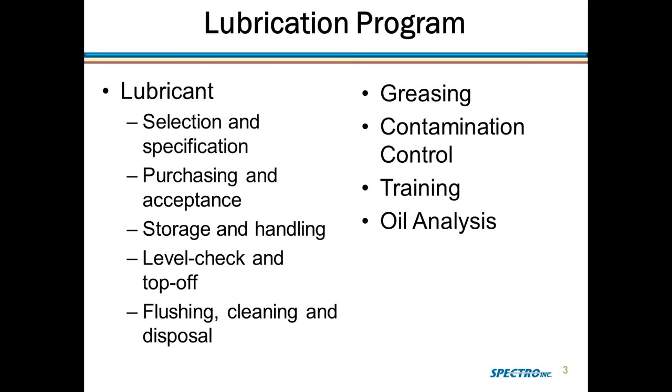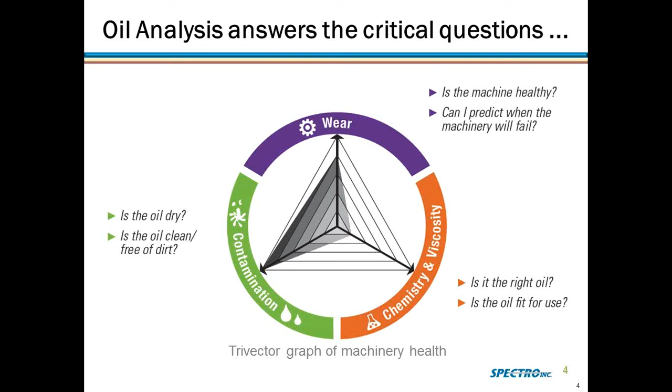From an oil analysis point of view, which is another condition monitoring technology besides just ultrasound, vibration, or motor analysis, oil analysis involves looking at three things: the wear condition of a machine, the contamination condition of the lubricant system, and the chemistry condition of the lubricant. Those three are pretty much independent, and we're going to take a look at those and explain how the reliability of the system is measured using oil analysis.

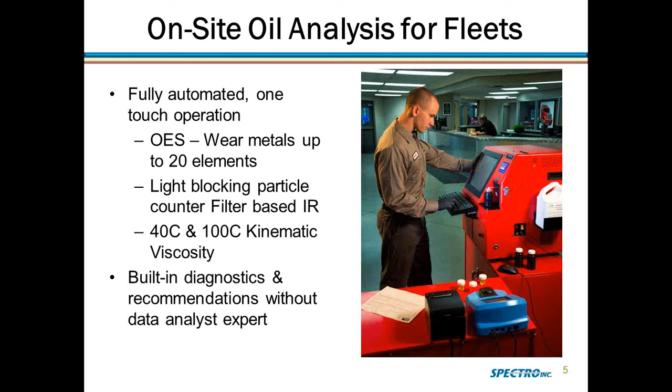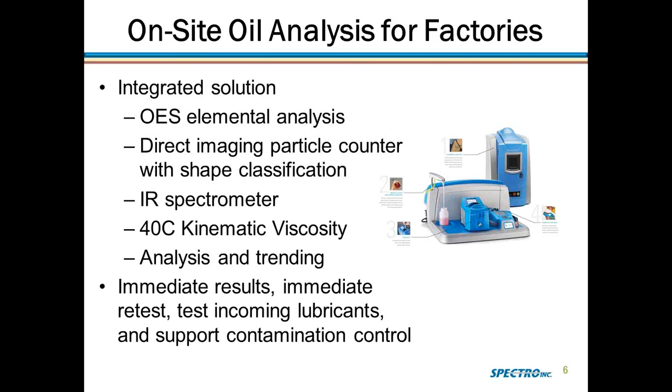A brief orientation to this presentation: we'll introduce Spectro to those who are listening, that's who's paying my bills. Then we'll talk about how to identify root causes, root problems and their causes for why machines fail. This is totally independent of which technology you use to look at the root problems, but it does give you an insight on how lubrication helps see those in addition to the other technologies people use.

Next is oil analysis results that guide maintenance practices. Then I'll give a case history and mention a few references if somebody would like to go back and check up on some of the things presented in this presentation. We'll naturally have questions after that.

Just to begin with, lubrication is typically a program within an industrial plant or in a fleet of vehicles or equipment. The machinery that's running is running on a lubricant film, and to keep that healthy and keep the machine running for a long time without a lot of noise and power consumption, there's normally a program that says we have the right lubricant, it's been specified, purchased, stored properly, we check the level, top off things, flush, clean, and dispose of the lubricants, do proper greasing and re-greasing. I know that's a big topic.

That's very much the life of a system, because abrasion we'll talk about here in a little while. Training is a key aspect of a lubrication program, and we're doing a little bit of that today. And then oil analysis is another aspect of a lubrication program.

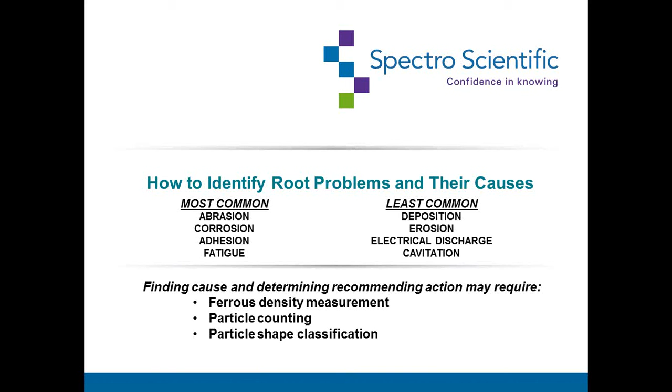Another 15% of the problems, which are less common, deal with deposition, erosion, electrical discharge, and cavitation. So on this slide, I'll just talk about those last four, and I won't bring them up again.

Deposition is what happens when you have varnishing, plating, or accumulation of material on a surface. A fan gets out of balance when it accumulates a bunch of debris on it. Valves and things start not functioning well when varnish accumulates on them. So that's a deposition problem.

All the rest of these, seven of eight here, are removal problems where they remove metal from surfaces. Erosion is what happens when you have blasting, like sandblasting, where particles impinge on a surface.

Electrical discharge is where you have electrical sparks that blast into a surface, typically where a bearing is carrying a current, and that's not supposed to happen. But when it does happen, because there's a gap there, the spark goes through the gap and blasts away a little bit of the material on the inner race or the outer race.

Cavitation is what happens when you have a pressure collapse, like on the backside of an impeller. So those are four that we won't talk about today, but the other four we will talk about.

Some of the key measurements people want to do—there are a lot of typical measurements, but the special ones we need to pay attention to have to do with looking for ferrous density measurement. That's a generic way to say I want to see particles that are iron and larger than 5 microns, because those are the real evidence of material damage from abrasion, corrosion, adhesion, or fatigue. They're going to typically show up big time in the ferrous density measurement.

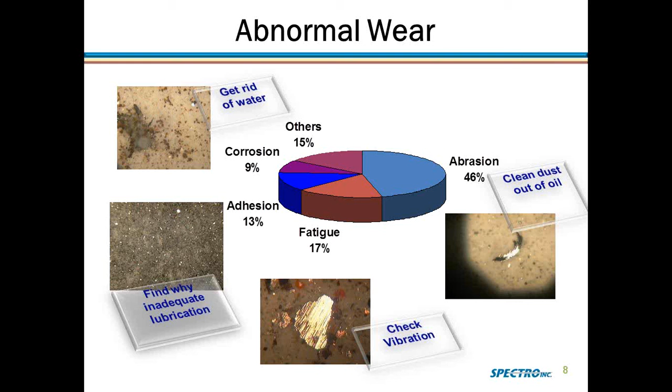Abrasion is caused when a piece of dirt or sand gets trapped in a nip, like between a roller and a race, a roller and an outer or inner race, or between gear teeth coming together. Just about any place a particle gets caught between two moving surfaces—if it's a hard particle, it will embed in the softer of the two surfaces and cut the harder one, producing a particle that looks like it came off a lathe. Like the picture on the lower right, it's pretty amazing. And abrasion is in many places public enemy number one.

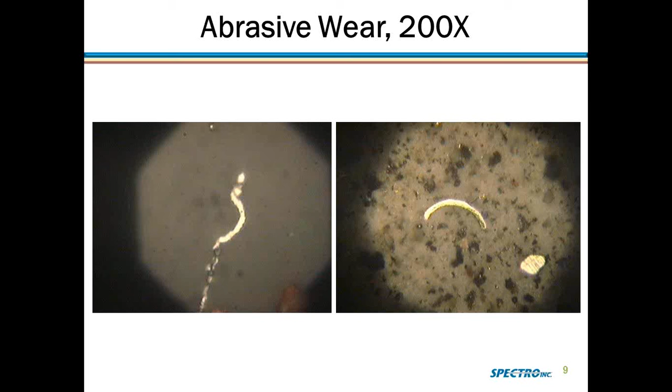If you can eliminate the dust contamination - because sand or silica cuts through steel like a knife cuts through butter - that helps a lot. That process of cutting or abrading the surface is very damaging and shortens the life of machinery a great deal. Fatigue is what happens when rollers... it's kind of like the rolling contact disease, and rolling takes place in two kinds of components.

One is obviously the rollers and races of roller bearings, but also at the pitch lines of gears, there's a rolling contact right at the pitch line where the heavy loads are transferred. That rolling contact produces a very intense Hertzian shear strain right beneath the contact line, and that tends to cause fatigue and spall, with particles coming out that look like chunks or platelets.

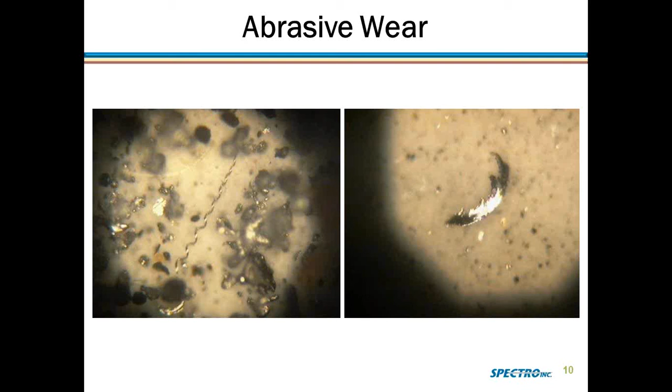Adhesion is what happens when we have inadequate lubrication - the sliding action. This is the sliding contact disease, whereas fatigue is the rolling contact disease. Adhesion is when the lubricant film is broken through, and that's going to cause a lot of heat, a lot of friction, and a lot of material removed, because the friction means you're doing a lot of work, and that work takes material off the surfaces.

So inadequate lubrication is definitely a problem because the lubricant film's been broken through. Normally a roller separates itself from a race by a micron, or a journal separates from a shaft by 75 or 100 microns or more. That spacing is critical to keep the life of the load-bearing surfaces long.

Corrosion is what happens when we have a corrosive media such as water or a process contaminant that attacks the metal surfaces chemically by oxidizing them, so that when a rubbing action takes place, it rubs off the soft oxide that formed. Okay, so let's take another look at these four things with a few examples.

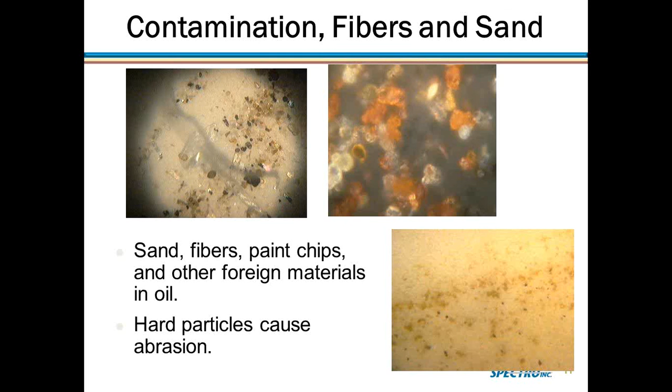This is clearly a picture of abrasion. It looks like something you picked up off a machine shop floor. This kind of particle is an indication that you have what's called three-body abrasion. A lathe would be two-body abrasion, where you put a cutting tool into a mandrel. In this case, a piece of sand introduces itself into a tight space and starts cutting a groove in the opposing surface it's contacting, and particles like this come off.

Some more examples of abrasion. You really don't need much explanation - anybody can understand this once you look at it.

So it's important to see what's inside of the lubricant. The lubricant does a nice job of carrying important evidence to you, the reliability team. I've heard it said that if we didn't have blood in us, a doctor would squirt some in us just so they could pull it back out, because it carries so much information the doctor wants to know. We don't do that for machines, but it's fortunate that machines have their own fluid, which can be pulled out and sampled to carry this kind of useful information to an interested observer.

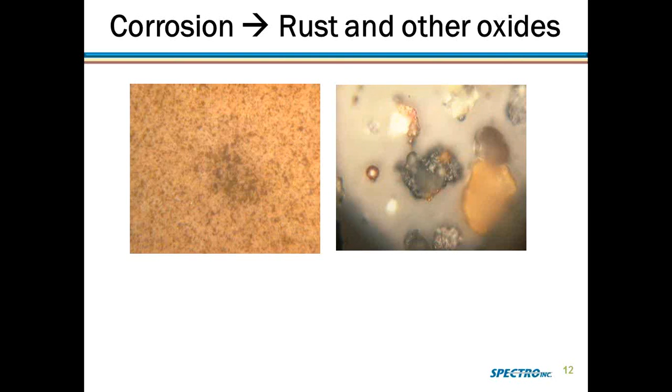If you really want to remove material fast, you use abrasion - like a grinding wheel or a cutting tool - and it removes metal fast. But if you want to remove it even faster, throw some lubricant down, cool things down, reduce the friction. You can cut twice as hard, or twice as fast, twice as deep with half as much load, just by lubricating the dirt or sand or the cutting tool, whatever it is you're using.

Unfortunately, the solution here is not to remove the lubricant, it's to remove the dirt. The dirt has to go, and we have what we call a contamination control program that sets target cleanliness levels for acceptable particle counts, assuming that a lot of that debris is actually hard particles like dirt.

Corrosion is basically, here's some red oxides. I only use this example not because it's the most important picture, but everybody recognizes rust as being red. At least certain types of corrosion on metal, on steel, are red.

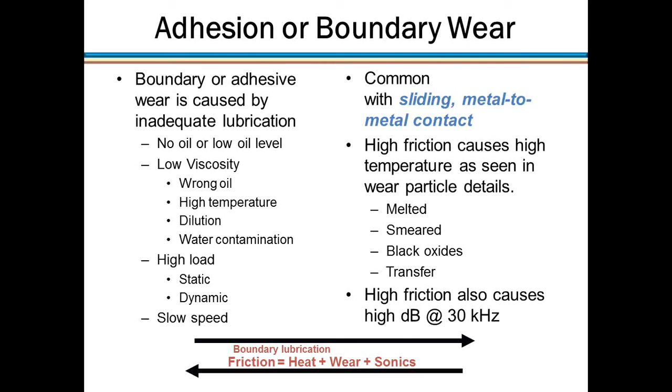The rollers are in rolling contact against the two races, but they're in sliding contact with the retainer. And you can picture that in your mind as the retainer or the cage is actually just kind of keeping the balls or the rollers, whether there's balls or cylinders or whatever they are, separated approximately an equal distance apart. The thing that keeps them in position relative to each other is a cage that slides against the rolling ball. It doesn't roll against them like the outer and inner races do.

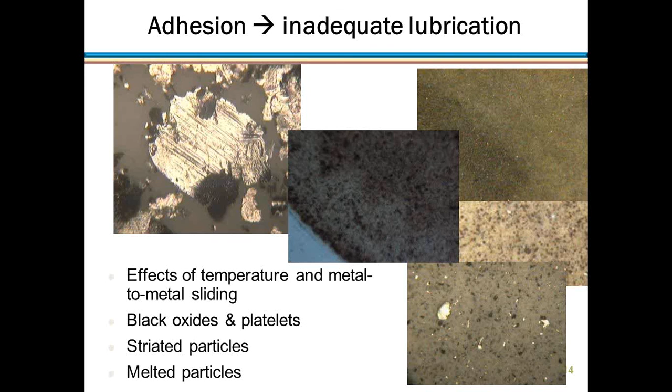And that sliding contact requires about 75 microns, or 3/1000 of an inch, of lubricant to keep it lubricated, as opposed to the roller to race, which only takes a micron, because of the very, very, very precise dimensions between the roller and the race. It tolerates incredible loads and very thin films to keep things apart.

I tell you that thickness difference in the two films, the film of oil between the roller and the race, and the much, much thicker film between the roller and the cage, because the first one to get starved is going to be your cage to roller contact. Now, there's not very much load in that interface, but there is a lot of friction, or at least a lot of friction noise, a lot of ultrasonic noise will be created when you have inadequate lubrication.

So I would just point out that that's a good topic for UE to pay attention to. In any case, the effects of this inadequate lubrication problem, which is so prevalent, is that you have heat, wear, and sonics, or ultrasonics, if you want to call it that. It'll have a very broad band of frequency outputs, from even a few kilohertz to hundreds of kilohertz of energy being emitted from that sliding contact.

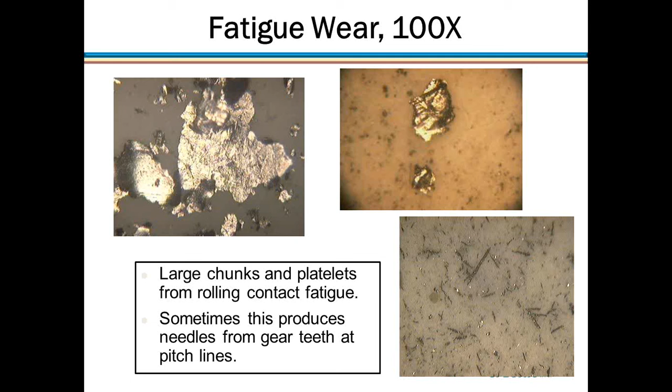Okay, back to more interesting things. We've got particles that come off of adhesion. There's going to be a lot of black oxides. There will be key ones that differentiate this from corrosion, which also produces black oxides in many metals: the appearance of platelets and striated particles that have scratch marks or rub marks on them.

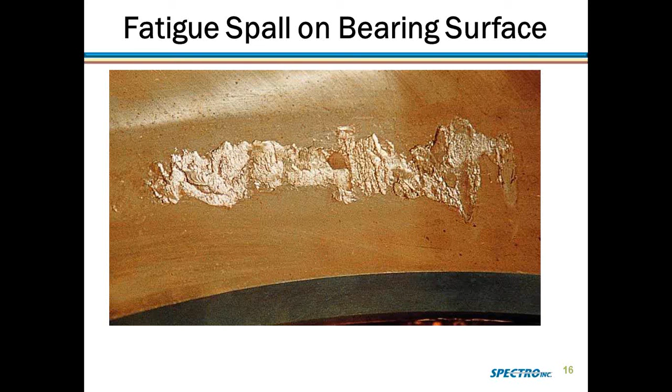Sometimes you'll see two different metals melted onto one another. Some dissimilar metals actually end up in the same particle because they've dragged across one another. So these show the evidence of extreme temperature, extreme pressure, and extreme force. And sometimes you'll even find sphericals, because something just totally melted and the liquid metal froze in the oil to form a little droplet, a sphere.

So it's pretty cool. Okay, fatigue wear is the next one we'll talk about here. Fatigue is what happens when you have rolling contact and millions of cycles. It's called high cycle fatigue. Low cycle fatigue is different, but this is high cycle fatigue, which means it goes through millions of cycles of the roller rolling over the race, or the gear at the pitch line transferring load to the next tooth at the pitch line of that next tooth. Those kinds of long-term loads cycling, they cycle over and over again.

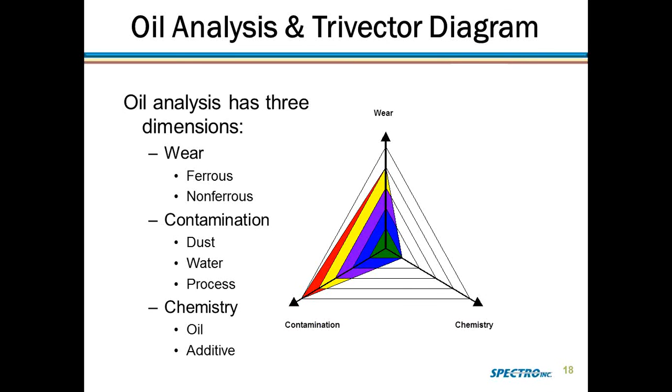That's a cumulative effect, and depending on how high the loads are, if you double the load, the fatigue life will be diminished by 90%. If you double it again, that 4 times increase in load will take it down 99%. So the fatigue life of a good bearing or gear or industrial component might be 40,000 hours of continuous service. If you double the G forces, and that's what we use to measure load in a vibration world, the dynamic loading is measured in G's or meters per second squared - take your choice. If you're running with 1 unit and you double that to 2, your fatigue life goes down by a factor of 90%. And if you double it again, it goes down by 99%.

And what you see happening is stress fractures happening underneath the rollers, underneath the surface - subsurface cracking due to Hertzian stress, which I won't try to explain in this presentation. But you'll end up with what looks like somebody has scooped out pieces of metal from the race or the roller or the gear tooth. And that's not anybody scooping anything out. All it is, is cracked subsurface that got interconnected until a piece of metal fell out into the oil.

Okay, that is over. Next section is all about oil analysis. So now that we understand why machines fail and how they tear each other up with the most common problems, we're going to use oil analysis to try and see those and their root causes. And by the way, if you do an oil analysis program and you don't use it to impact the maintenance practices, then you better just stop, because somebody thinks you're doing a good job. Oil analysis really has to change maintenance practices or you're just spending money - you have to use the information. I can't tell you how many people do oil analysis like they're taking vitamin pills, and they don't really have any benefit from it. So don't do that. It's good information. Use it and change your maintenance practices based on what you hear. You get excellent return on investment, and I'll talk about that at the end of this presentation.

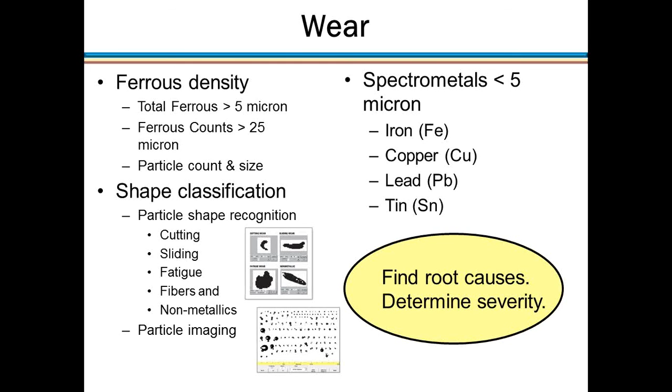Okay, repeating, oil analysis has 3 dimensions. Normally, the wear component looks for both metals that are ferrous and metals that are non-ferrous, like copper or antimony, lead, tin. Contaminants are dust and water. Now, water covers 3/5 of the surface, dirt covers 2/5, and those are our 2 main enemies. Those are actually the biggest things going on here - dust and water. And then there's process contamination too, like a lot of acids that can come from some processes. And the chemistry of the oil has got to be healthy. If you put a good lubricant in there and have the right lubricant at the right level and it maintains its healthy condition, that's a nice thing to do, and there's really no excuse for not keeping the lubricant in good healthy condition.

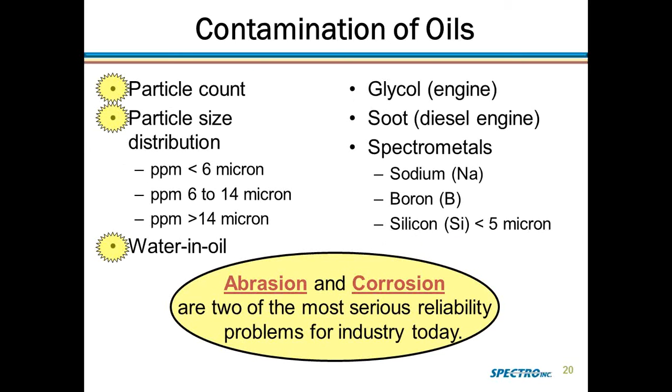Okay, looking at the wear thing again, how do we do this with oil analysis? Well, first of all, we need a ferrous density measurement, which means we're looking for total ferrous particles larger than 5 microns. That's really important because I don't really want to know about the oxide metal, and that's going to be submicron size. What I care about is the real metal. The oxides are not metal, by the way. The truly metal - iron or copper, whatever particles you see in there - when they're metal, that means you tore them out of the surface and there's something abnormal happening. The oxides, 98% of them are perfectly normal, so you don't want to get lost trying to chase normal.

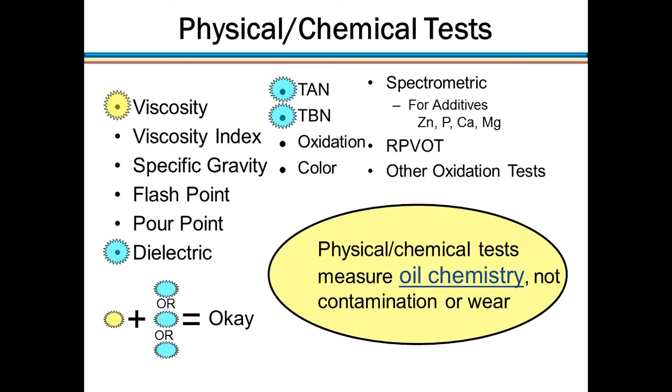Ferrous counts - a new instrument that we'll talk about here is actually doing a total ferrous count, counting all the ferrous particles larger than 25 microns, as well as counting and sizing all of the particles, ferrous or not. So that's a pretty important thing to help look at wear.

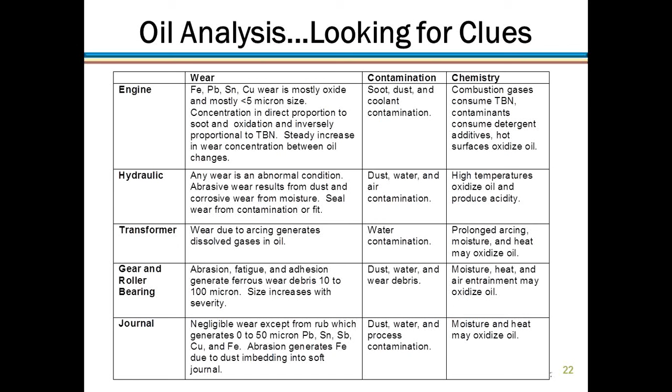The next thing is a subject called shape classification. Until this year, I've always preached the idea of wear debris analysis, because you really want to know what these shapes are, and until recently, you just had to use a human being and a microscope to see them. Now, the 2-dimensional imaging camera in a particle counter can see not only the size and count of particles, but it can actually shape classify the particles and give you a complete report and analyze those shapes - tell you how much is cutting, sliding, fatigue, and non-metallic or fibers. Okay, particle imaging is really important to finding out the root cause so you can do the right corrective actions.

In addition, it's very important to use, particularly for engines but also for other machines, an elemental analysis technique looking at the very small particles in addition to the very large ones. The small ones are best seen with a spectrometer, and you can see all the elements—20 or 25 elements even—iron, copper, lead, tin, and we'll talk more about that.

Contamination of oils—in order to see those contaminants, you care about water and you care about solid particles. So we want to count the particles, size the particles, and measure the water in the oil.

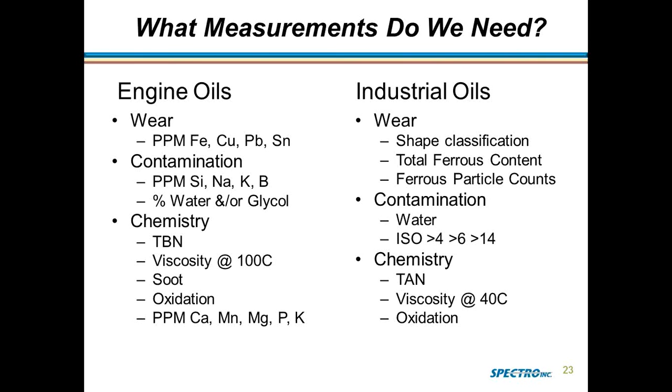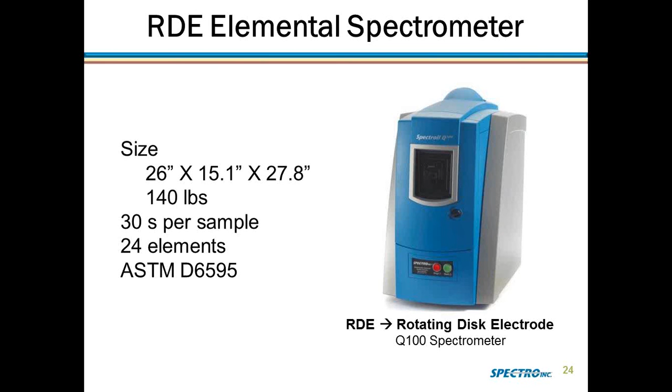For chemistry, you need to know the viscosity, because that's a basic fundamental property the oil needs to have in order to perform. But then you also need to know that the oil's healthy, and you fingerprint it to make sure it's the right lubricant, and you look at the level to make sure it's the right lubricant in the right place. So in this chart, I've highlighted with a yellow star the viscosity.

There are many different ways to see the chemistry, but typically somebody uses total acid number for industrial machines, total base number for engines, or a dielectric, which was used until just recently—everybody switched pretty much over to total acid and total base. A lot of other chemistry tests can be done, but we really need you to pay attention to keeping healthy oil in the machine.

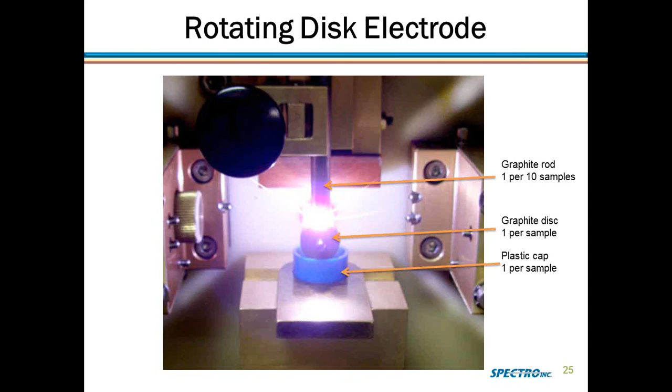When you look at any kind of mechanical system, or electrical system for that matter, things are going to fail, and you should be able to see it if they're lubricated or contain lubricants in them. So even transformers, for instance—transformers are going to wear because arcing takes place, and that arcing causes a process of wear. Engines, hydraulics, transformers, gears, roller bearings, and journal bearings each have certain mechanisms of wear. They have contamination that's commonly introduced into the system, and they have chemistry problems that occur due to aging of the lubricant or other damaging effects on the lubricant.

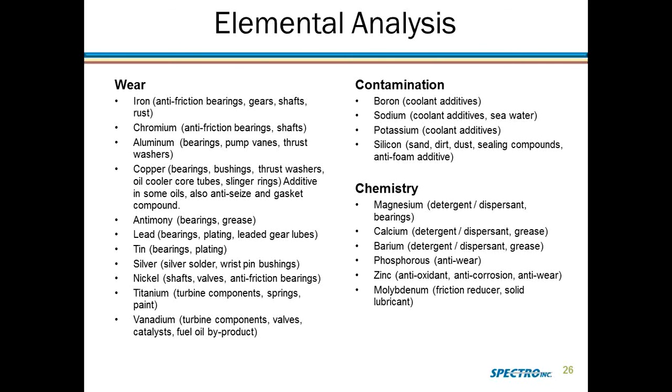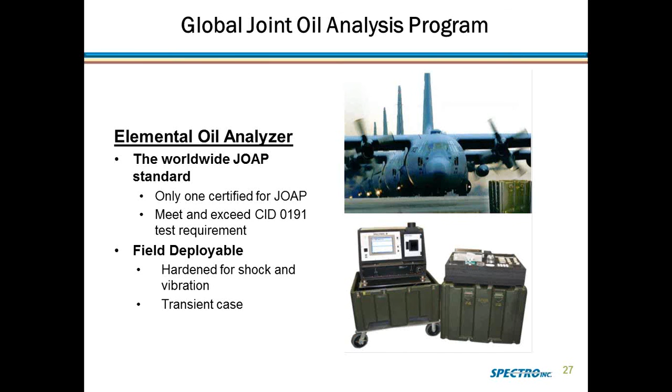For engine oils, you need to look for the parts per million, or the elemental analysis: copper, lead, tin, iron, contaminants such as silicon, sodium, potassium, boron, water, glycol, total base number, viscosity, soot, oxidation, and some additives—additive elements such as calcium, magnesium, phosphorus, zinc. In the industrial oils, you really need the shape classification, total ferrous particle counting, the water measurement again, particle counting.

Particle counting, total acid, viscosity, and oxidation. So that's giving you an idea of what kind of things we need to have.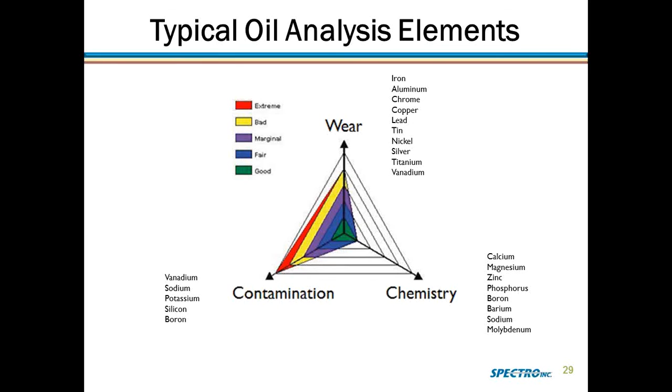Where do you get these numbers from? This is an elemental analyzer—a rotating disc electrode type analyzer. The way it works is an arc takes place between a rotating rotor, a little disc, and the disc picks up oil from a cup, carries it up to a spark or an arc, and vaporizes the oil.

When you throw copper into a flame, it burns blue. It turns out all the elements have some kind of color to them. So we use that information from the colors that come off, put them through a spectrometer, split them down into their basic colors, and we can tell the amount of what elements are in that oil.

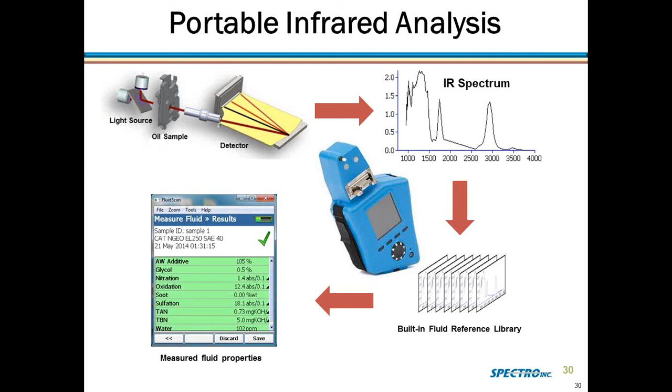This is just a chart that I would briefly mention—I'm not going to go into the details of it—but the elements that you find in a spectrometer are really useful because as you get the proportions of them, you can tell what components, particularly in engine oil analysis, are giving you a problem and which ones are not, because the different elements come from different parts of the machine.

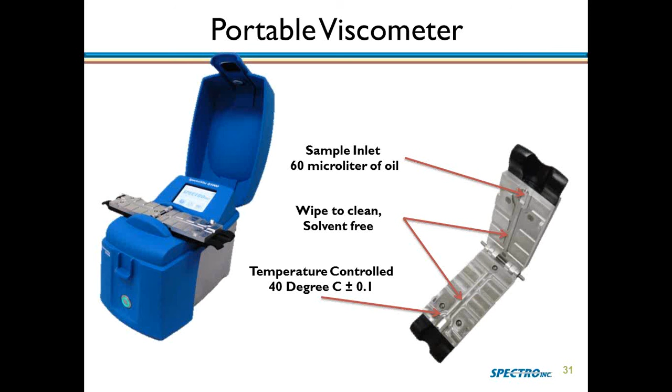Or in some cases, they're contaminants like boron and sodium and potassium, or coolant additives maybe, and you find them in the oil. That means the coolant has gotten into the oil—coolant boiled off and left behind these additives. Silicon is often an indicator of sand or dust, but it could be an indication of a sealing compound or an antifoam additive. The chemistry, as I mentioned earlier, is you're looking for the additives that somebody puts into the oil, and you don't really care what they are as long as they're the right ones in approximately the right proportions to tell you that nobody has mixed up your lubricants.

Spectro has been a supplier to the Worldwide Joint Oil Analysis Program, basically the Army, Navy, and Air Force, for all their elemental spectrometers for 25 years now. Ever since I've been associated with them, they've done a great job and achieved quite a name globally with this. The new smaller packages are even being used by a Formula One racing team.

This chart shows the same information redundantly, repeating where you can see the elements laid up against the wear, contamination, and chemistry vectors of the Trivector. The next technology we'll mention is portable infrared analysis.

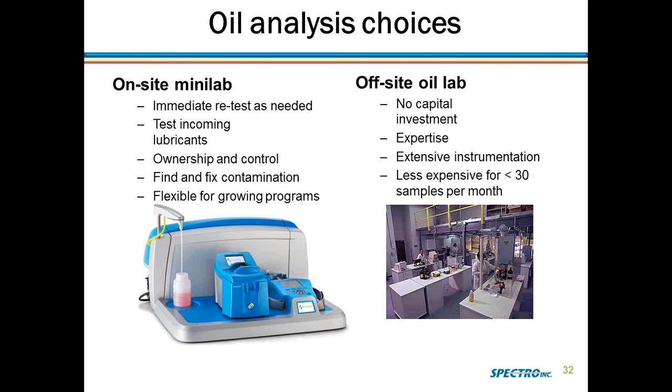You've got a little slide that comes out and opens up two windows. You put a drop of oil on one window, flip it closed, and stuff it in. The instrument is handheld and battery-operated. It automatically analyzes the oil by passing a broadband infrared light through it and looking at what gets absorbed.

What's absorbed in the absorption spectra is like a vibration spectra telling you what's vibrating—in this case, the molecules. The molecules that vibrate take energy out of the beam, and from that we can tell the chemistry of the oil and what contaminants are in it, like soot or glycol, what kind of damage has been done by nitration or sulfation, what acid buildup is taking place, and what base has been removed. It's a pretty cool chemistry set, and it does water as well.

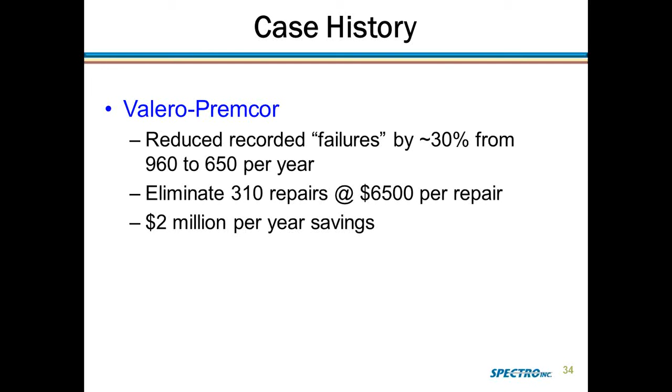Viscosity is now being measured with another similar flip-top device. Both of these are very simple to clean—there are no solvents. You just wipe them clean with a blue towel, put a few drops of oil on it, and it measures the viscosity as the oil goes down a capillary tube. This has been incredibly successful—everybody loves it.

So you get a couple of choices: you can do an oil analysis by a laboratory or a mini laboratory. The mini lab on the left is a combination of a viscometer, the infrared, and the elemental analyzer. It's really good because it allows you to test incoming oils—there's almost no other way to know the supplier is delivering clean oil, free of water, with the right additive package and viscosity range. Those things can cause a lot of heartache if you don't know they're coming in.

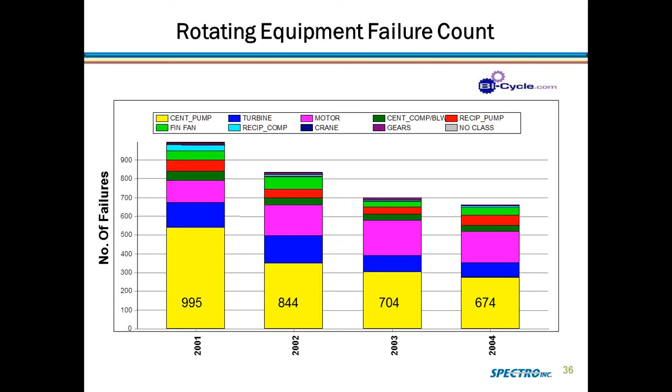Another thing you can do with this is resample. The most common oil analysis program is a resample request—you don't need to wait to send it off and get results back, you get it immediately. Ownership of the program is incredibly powerful because with this device, you hand the people who know the most about the machinery a very simple package to test the oil.

The off-site lab may have more expertise than the on-site blue-collar workers, but there's no capital investment. If you use a lab, you're just paying by the sample—you get more extensive instrumentation, and it's actually less expensive if you're running only about 30 samples a month. So you've got to trade off between these two options available in the plants or fleets.

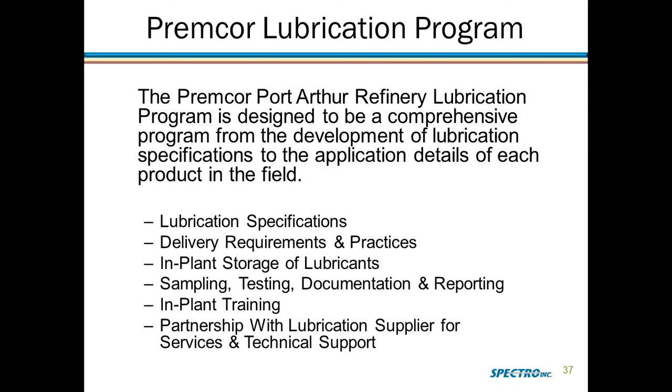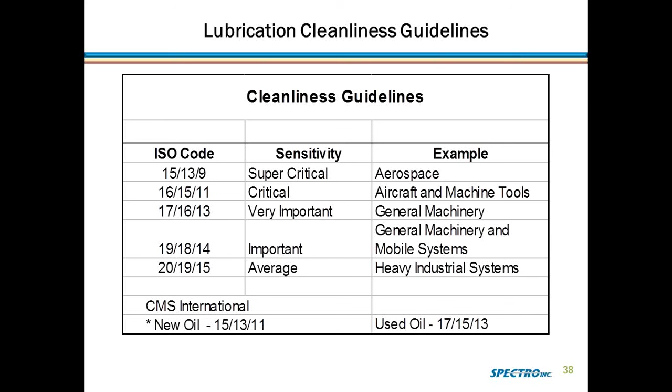Here's a case history before I get to questions. This case history I've chosen is just one—I could do dozens of case histories, but this is just one I chose for this presentation.

It's actually a plant near Beaumont, Texas—a Valero Premcor. Premcor is what it was called when this was done, but everybody has bought each other, and now Valero owns it.

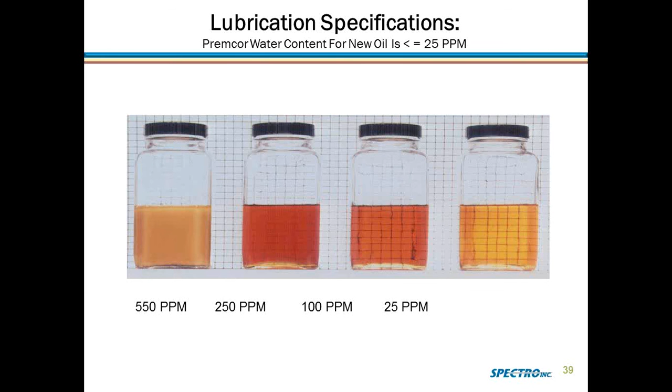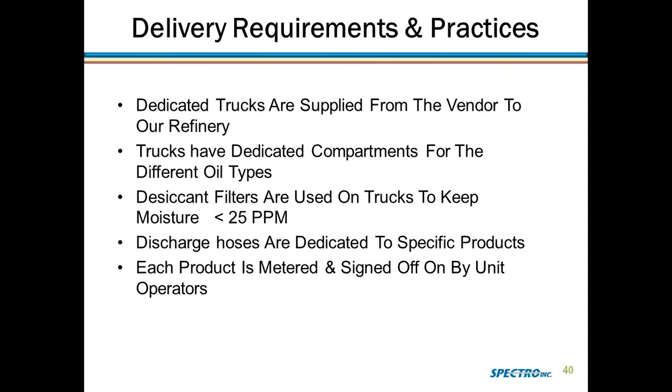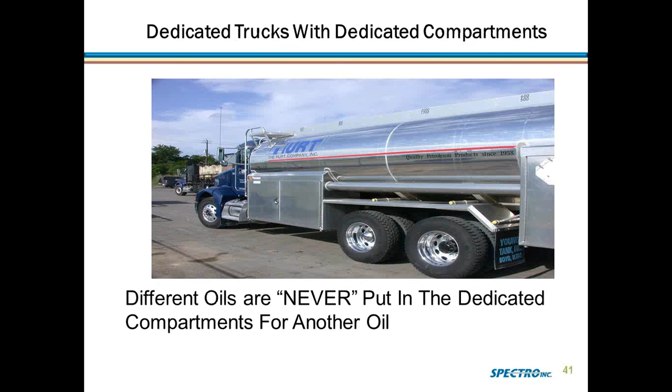They were awarded the Battle Award, a high recognition award granted to the Valero refinery. John Gobert and Jim Chrisman were the key people, with several others on the team at the Port Arthur facility—I called it Beaumont, I'm sorry, Port Arthur.

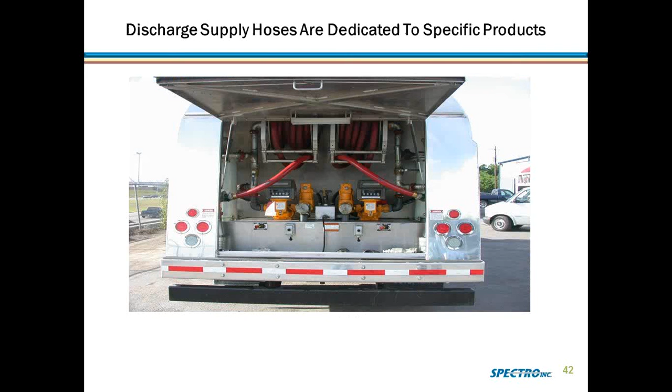Okay, this shows the answer at the end, but I'll get to it piece by piece. In 2001, they had 995 reported work orders, and by 2004, that was down to 674. I want to break it down as to which components or types of machinery had what reduction in work, and how they achieved that.

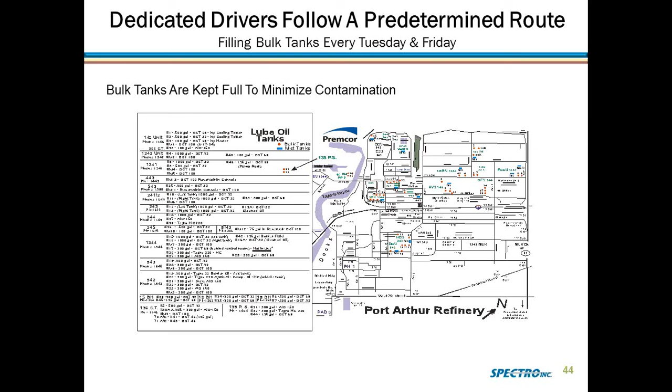What they decided at that plant was they made a concerted effort to try to become a world-class refinery from a maintenance and reliability point of view. They wanted to really get rid of a bunch of plaguing issues.

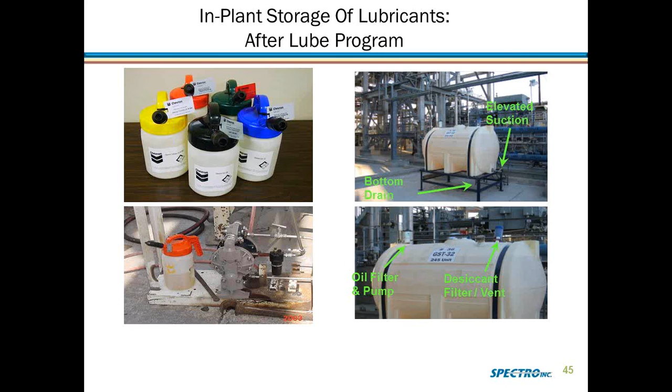One of the first things they did was set target cleanliness levels, TCLs. The target cleanliness levels were quite aggressive, but they couldn't achieve those by themselves, so in order to do this, they partnered with their supplier.

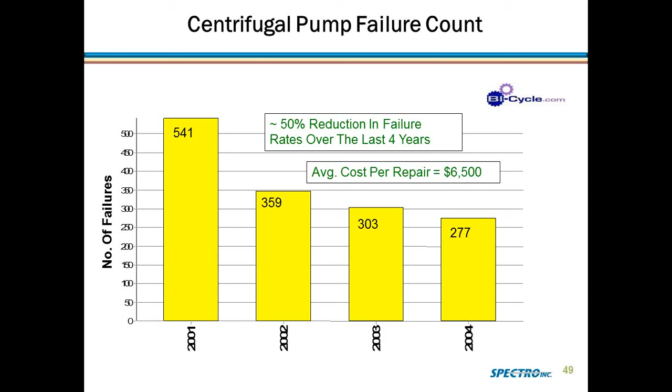Not only in particle counting did they set their goals aggressively, they also said we're going to get the moisture content of our lubricants down as well. They decided that in order to do these two things, they'd have to do on-site oil analysis, plus collaborate with their suppliers.

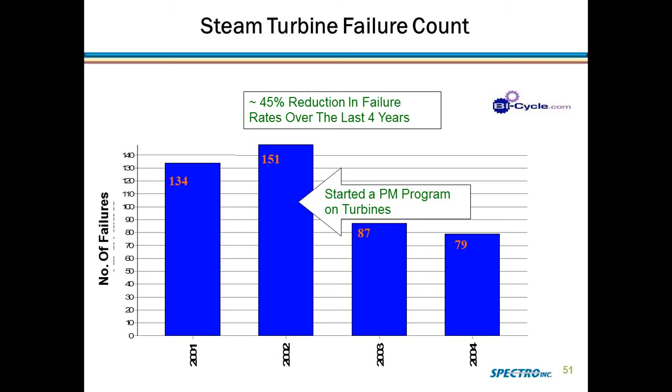They went to their supplier of lubricants, a company called Hurt Oil, and said, we really want you to deliver our oils, and we'll buy it from you in the future, but we want you to do something for us. They asked the supplier to use dedicated trucks with certified drivers.

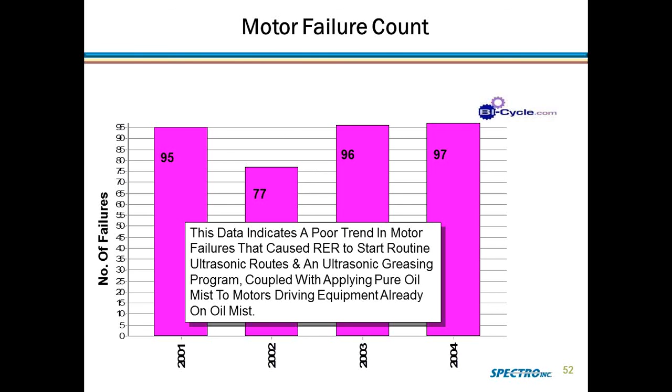And if there are two compartments on a truck, each compartment will be separated, and oil will never be mixed in those compartments. These are some of the other specifications you can see that they asked for.

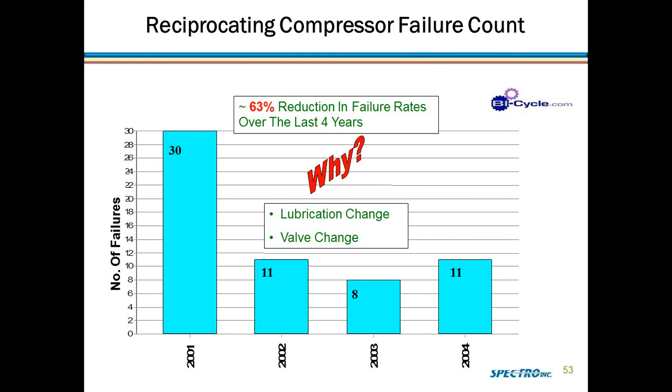They got that. They basically got Hurt Oil to implement modifications to their delivery trucks, so that if there were two compartments, they had to have two sets of equipment on the back of the truck. They had to have final filtration, and two different delivery systems, not reusing one system for multiple lubricants.

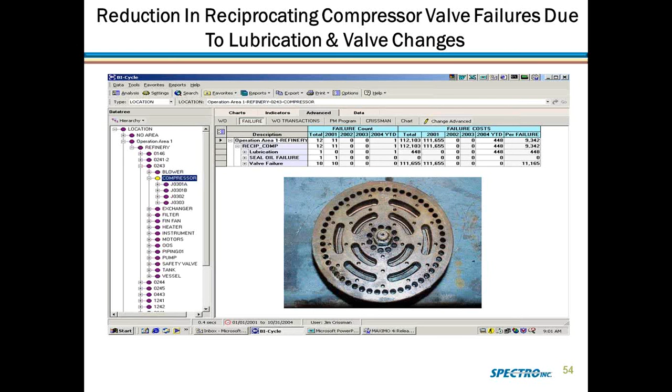They used a 1-micron final filtration. They had the operators required to take a certain route and only come in on certain days of the week, and they had to be certified and trained, and everybody had to buy off on this. They didn't just use a different operator every time, and everybody knew how important the Port Arthur facility was to the supplier, and they had everybody's full attention, so they always got the best product.

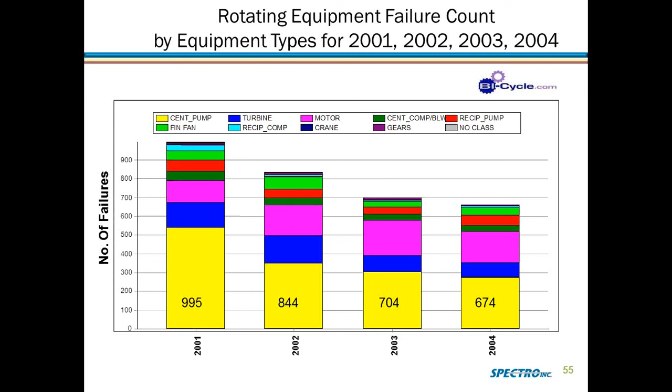In addition to dealing with that supplier, they worked with others to get clean oil containers, clean transfer containers, filters put on, breathers put on their compartments. They did sampling for the oil using an on-site mini lab. They tagged all of the sample points, storage points, and transfer containers, so that no one ever misunderstood what lubricant goes in which container.

The outcome of that was they achieved a cutback in the centrifugal pump failure count, down 50% over 4 years. Average cost of repair was $6,500, and this is a very substantial cost savings.

The centrifugal compressor blowers also demonstrated a 37% reduction over the time. Now, there was an increase in the second year for turbines, but the reason for that was they had a maintenance action that had to be worked off, and so many of the work orders had nothing to do with history — they were just a new activity that had to take place for that second year.

The motor failure count did not change relatively year after year, and since most motors are grease lubricated, there was no impact on motor failure counts. So it serves as kind of a control to the rest of their program. The reciprocating compressors showed a surprising 63% reduction in failure counts. One would ask why — it's because they had a change in the lubricant. This doesn't happen often, but occasionally you'll find that you've got a problem.

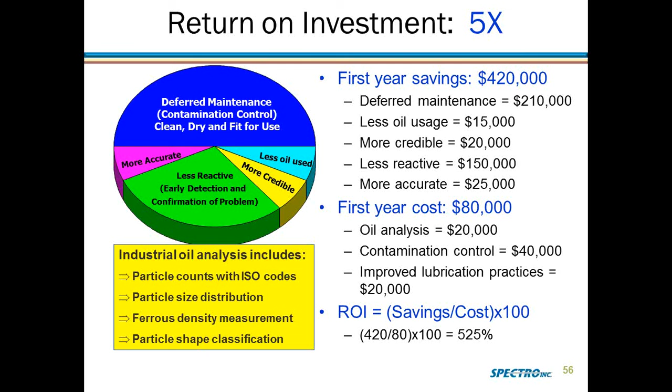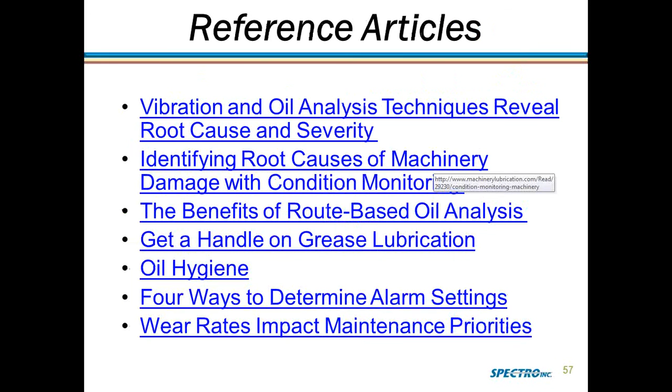You've selected the wrong lubricant for the application, and the lubricants they were using were causing a problem of varnishing. The varnish was building up on the control valves, so about once a year they had to perform a $10,000 maintenance action on most of the reciprocating compressors. When they fixed this compatibility problem, they greatly reduced the number of work orders on this system. So in summary, the failure counts went down, and a couple million dollars a year was saved.

The program was quite successful, and really nice because they got recognized by the industry, by their peers, and I'm very proud of them myself.

Just a summary of returns on investment. I've got a lot of experience with ROIs, and there's a lot of ways people save money, but the key oil analysis part of this is being sure to do particle counting, particle size distribution, ferrous density measurements, and particle shape classification. The people that do that get incredible savings.

What they see is deferred maintenance. They see less. What you just saw in the previous slides was somebody who's deferred a lot of maintenance by not doing work orders because they don't need to. That's a huge cost savings.

Using less oil saves money. For every dollar you don't spend on lubricant, you save at least two to ten dollars on things associated with that lubricant, like buying it, storing it, handling it, and disposing of it. The lubricant purchase is a small fraction of the total cost of consuming oil.

You get more credibility because the lubricant guy, the vibration program guy, and the vibration analyst ask the lubricant guy about his data and always have better information. He says, well, I see something going on, it should be generating wear debris, but I'm not seeing wear debris, so you hesitate and just say there might be a problem. Whereas when you see both things telling the same story, you can be confident there is a problem. If you lose your credibility, you've lost a lot, more than money can even say.

They then cleaned up the program. They trained their employees, they put in a mini lab, they changed their maintenance practices, and they documented a 736% return on investment with $1.6 million in savings in the first 26 months, something like that. Just really incredible numbers, and this is all published.

So document where you start, document as you go through. In that case, those guys invested $100,000 and got $1.6 or $1.8 million return in the first 20-some months. Then they even went on more beyond that. Unfortunately, to tell the rest of the story, because we live in America, GM finally closed that plant—but that wasn't our fault, okay? We did our best to keep the plant open.

Okay, one more question and then we'll wrap up here. Ray will take the rest of these offline, but for an in-house analysis system, what is the calibration period? How often should the machine be calibrated? Is the equipment typically sent out for calibration, or is it done by the end user? And are there methods to check and validate the calibration?

I took those slides out of the presentation in consideration of time, but you calibrate most of these things right on site yourself. You'll run the fluid—we basically have control standards, calibration fluids, and you'll run those annually, or when you think something might be going awry, you recalibrate as needed. But I would recalibrate once a year, and/or sooner if you have reason to think you might have a question about a performance issue.